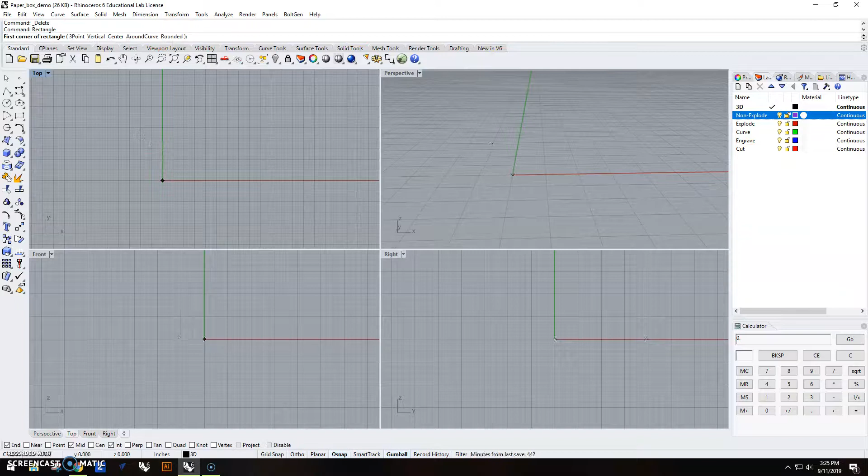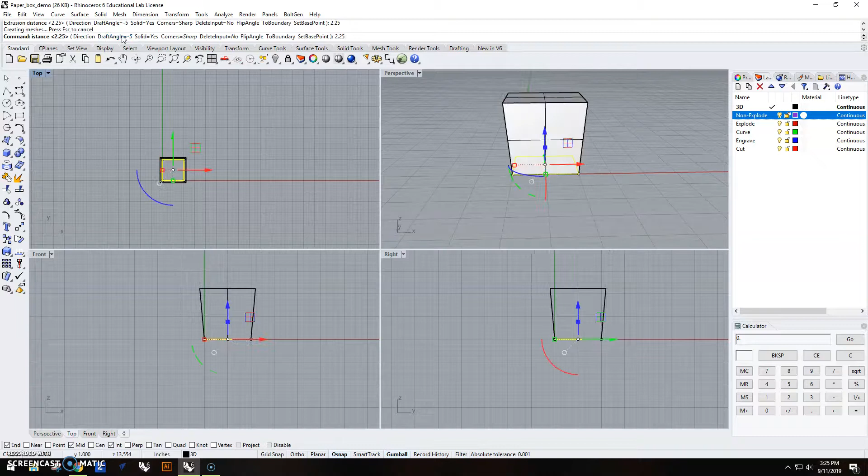So we're going to start with a rectangle. We're going to anchor it at 0 and it's going to be 2 inches by 2 inches. Then we're going to highlight that, go up to solid, extrude planar curve, and select tapered. I'm going to set the draft angle to -5 so it tapers outward from the bottom as we go up. And then extrusion distance will be 2.25. Hit enter, and there is my tapered box.

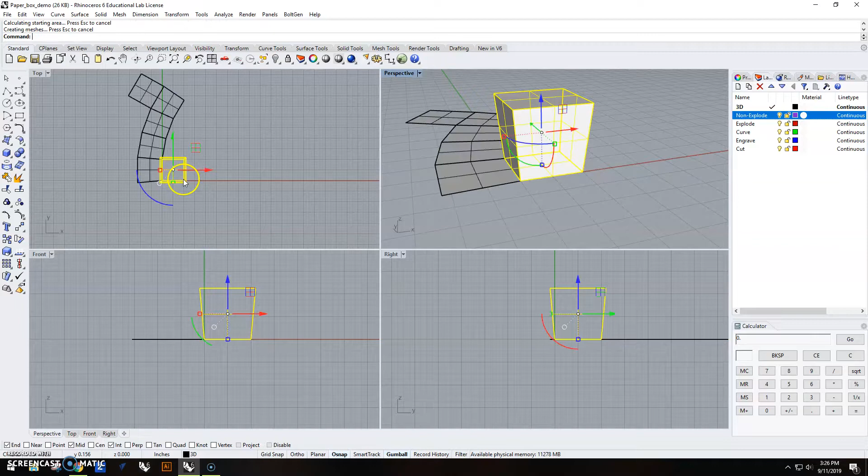Now we're going to flatten this two different ways, and we're going to use it at different times. So I'm going to highlight this, go up to surface, down to surface flattening, unroll developable surface. For the first one, I want to click on explode and have it say no. This will keep all the pieces together. So it's selected, we'll hit enter, and what it's done is flatten this box out into this fashion. I'm going to change this to the non-explode layer, and I'm going to turn that off for now. We will come back to that later.

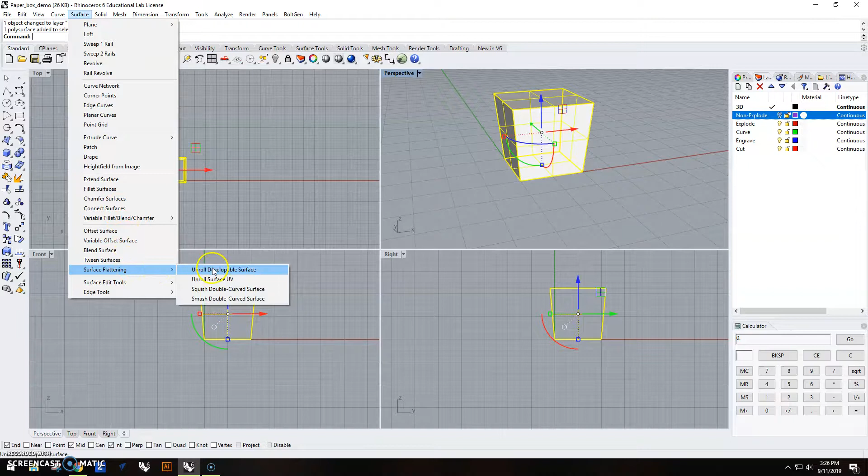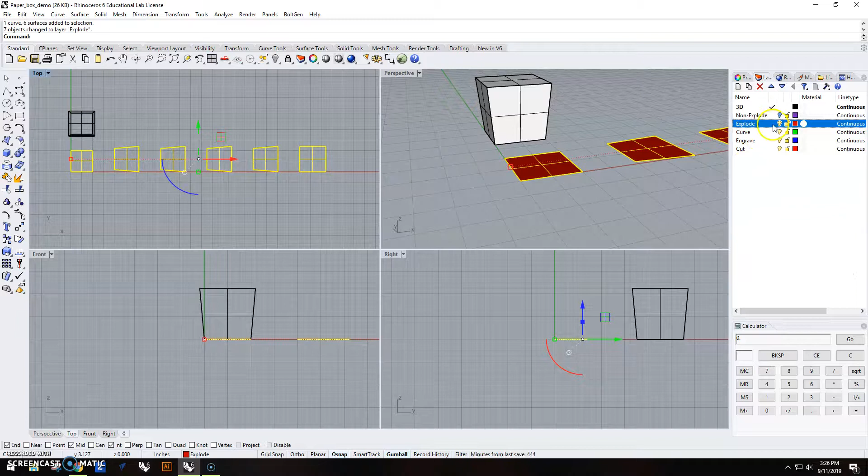I'm going to highlight the box again, surface, surface flattening, unroll developable surface, only this time I want it to say yes next to explode. And then I'm going to hit enter. I'm going to go ahead and move the box out of the way a little bit. And here's the bottom, the 4 sides, and the top. I am going to move those to the explode layer. And I'm going to shut off my box for now.

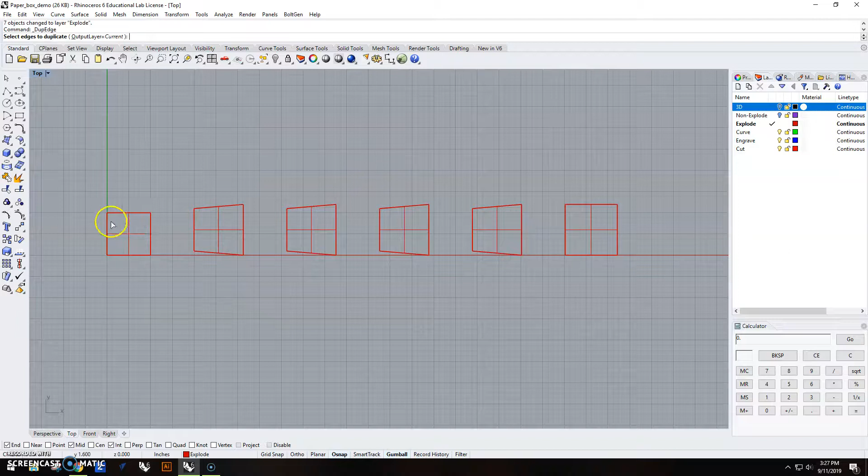So the next thing I need to do is change this so that I have some curves that I can work with. So I'm going to change to just the top view. And I'm going to go to curve, curve from objects, duplicate edge. I'm going to select all 4 edges of the bottom piece. And I should mention we should be in the curve layer for this, as the active layer.

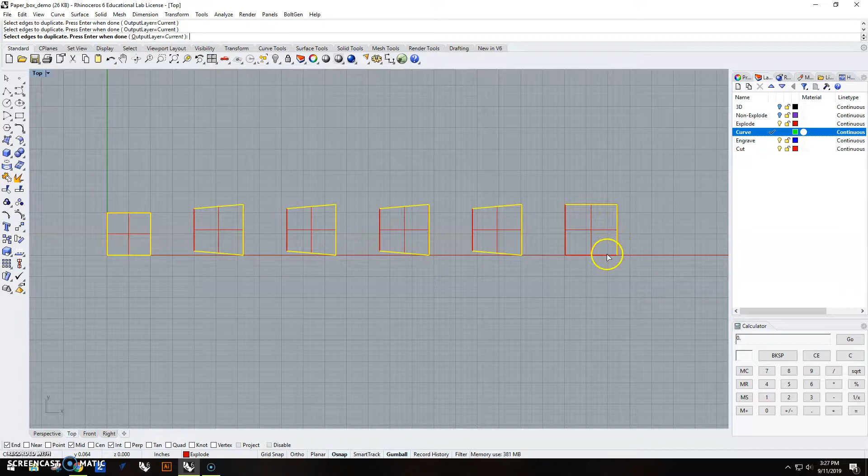Just the 2 sides and the top for the 3 side panels, like so. And then I just want 3 of the sides for the one that will end up being the top flap. So we'll hit enter. I can drag that up. Here's the curves that I'm going to work with. So I can turn off the explode for now. And I'm going to zoom out just a little bit.

So what we need to do is arrange this so we have the 4 side tabs so that they basically array around this. And then we'll add the top tab to one of them.

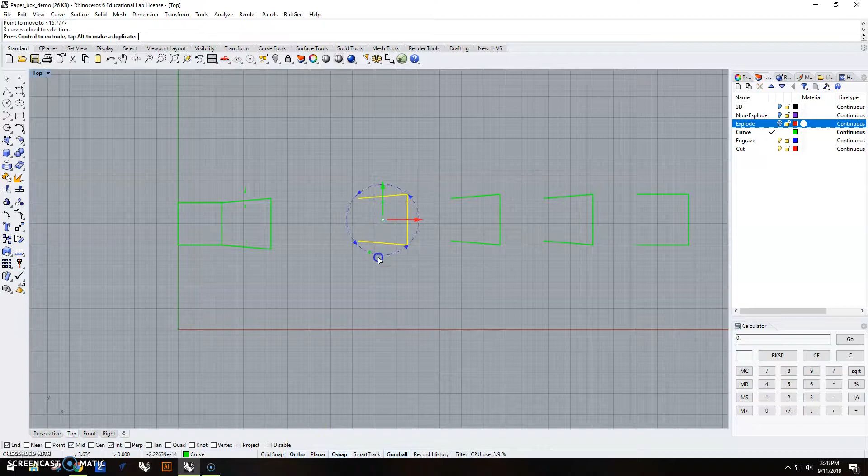So I'm going to highlight these 3, type move, and use O-snap. Make sure O-snap is on and end. Drag that over. And turn ortho on for this one so I can rotate it 90 degrees real quick. Then do move, click there, snap to there. Same thing, I'm going to rotate this 180 degrees. We'll do the same move. Click on one end, snap there. And the other one I need to rotate 90 the other way.

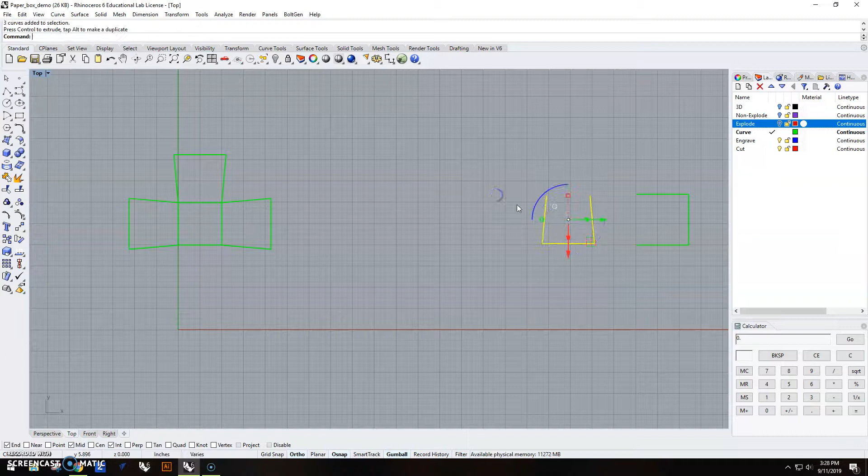Highlight all 3 of those. Rotate, move, just like that. And then the top flap here, it does not matter what side I put it on for now. So I'm going to go ahead and put it on this side. We'll zoom extents so that it becomes a little bigger.

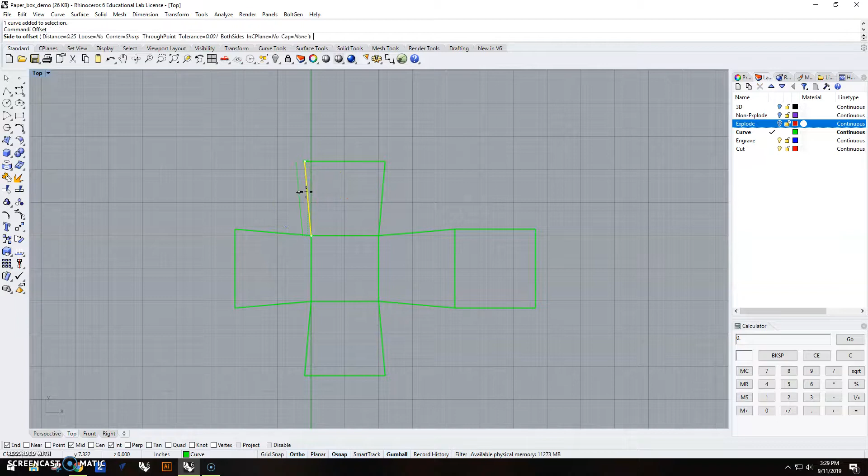I have not joined all these yet. These are still individual curves, and I have to do some offset, so I want to keep it that way. So I'm going to offset one of the sides. Doesn't matter which, I'll start with this one. Offset at 0.25 inches and drag that out to the side. And I'm going to do the same thing for the top here, offset 0.25 inches, drag that out.

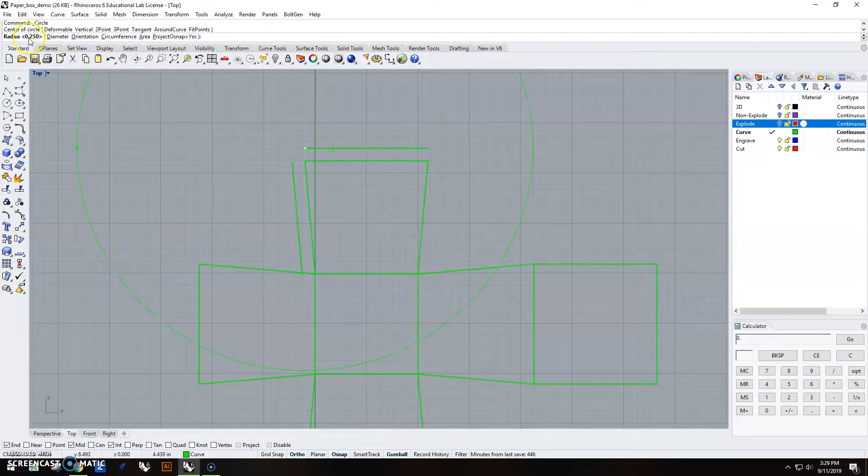Now I want to make 45-degree angles from here up to here. Easiest way to do that is to use our circle trick. So we're going to take the circle, start on the edge there, and I want a radius of 0.25, which I already have, so I can hit enter. I'm going to do that for all of these.

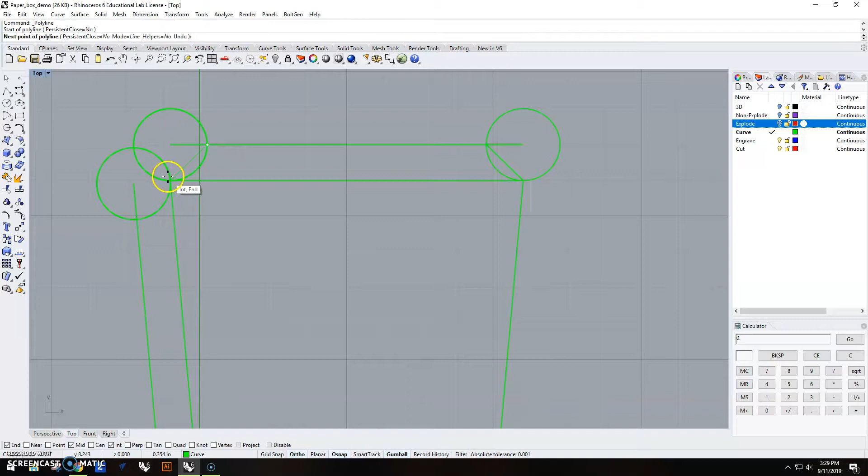With O-snap intersect on, I can draw a polyline from this intersection over to the edge, hit enter, and do the same for each of these circles I drew. That creates a 45-degree angle from that edge to that line. Now I can delete the circles.

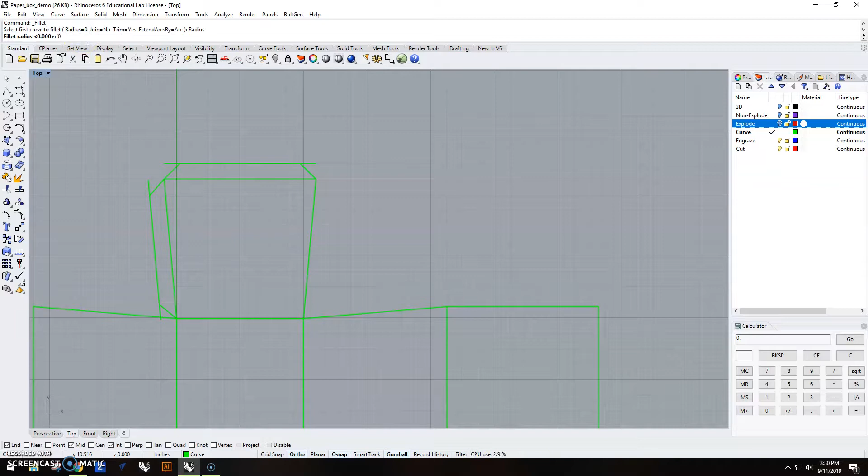There are several ways to get rid of these lines that overhang. We could do a split or a trim, but for this one we're going to use the fillet command and set our radius to 0. If I zoom in, you'll see what happens: click on this side, click on that one, and it brings that down so those are connected. Do the same here, here, and there. That's a little quicker than using trim or split, but any of those methods would work.

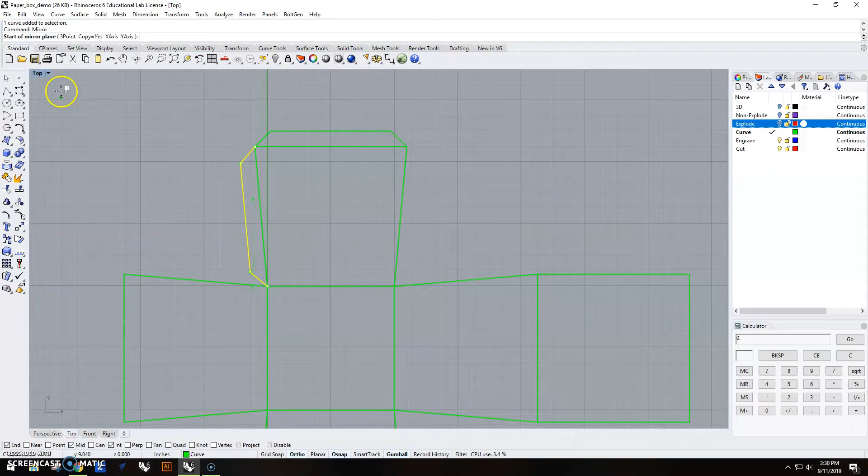Now I'm going to highlight these 3 pieces of the tab and mirror it. Make sure it says copy, and I have OSnap on — I also turned on mid for OSnap, so we snap to the center, then straight down. Now I have tabs all the way around this.

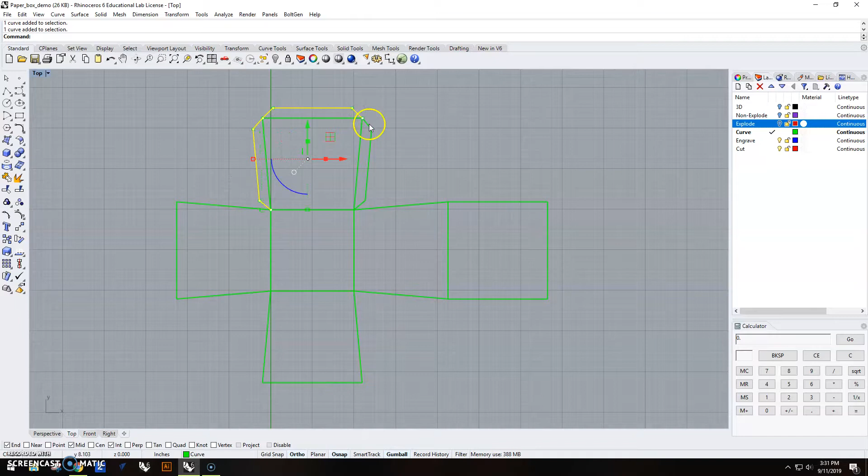I need tabs on this piece and tabs on this piece, so I'll highlight all of those, holding Shift as I select them. Then I can type mirror, this time snapping to the midpoint here. Whoops, let's try that again — hold Shift, pick just the lines, mirror. There we go, now we have that on both sides.

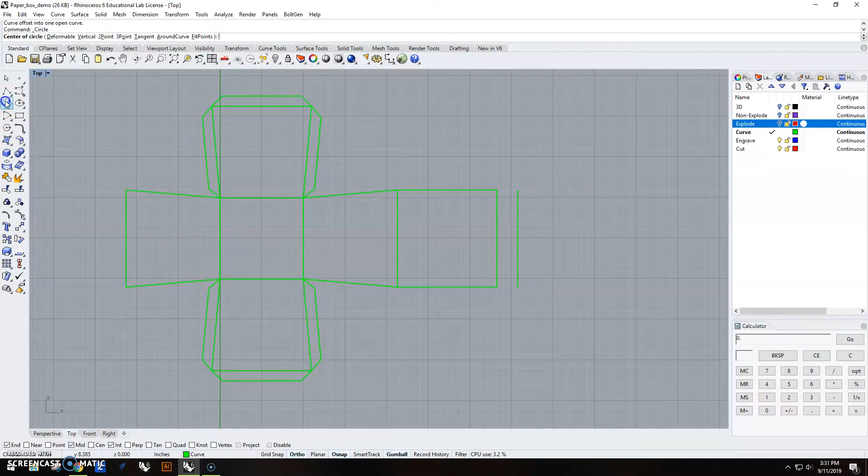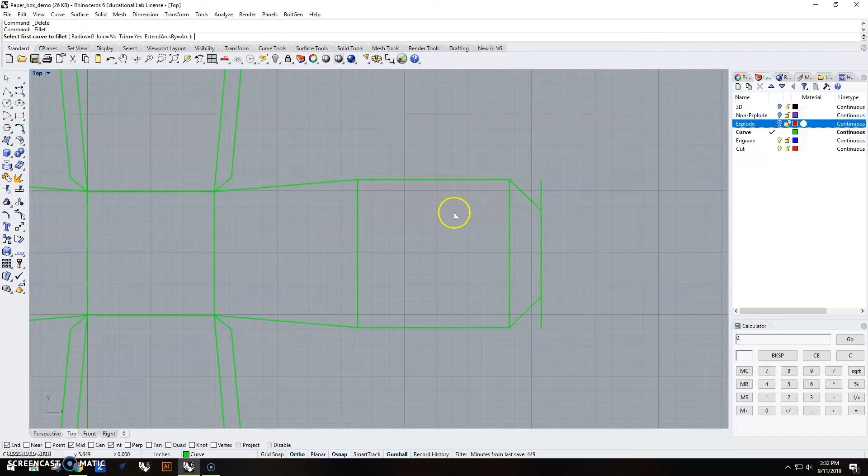For the top, for a flap, we're going to offset this as well — this time 0.5 inches. Drag that out, and use that circle trick again: center here, but set the radius to 0.5, right there. Draw a polyline in from the corner to the intersection, and from the intersection to the corner. Get rid of the circles, then fillet with a 0 radius.

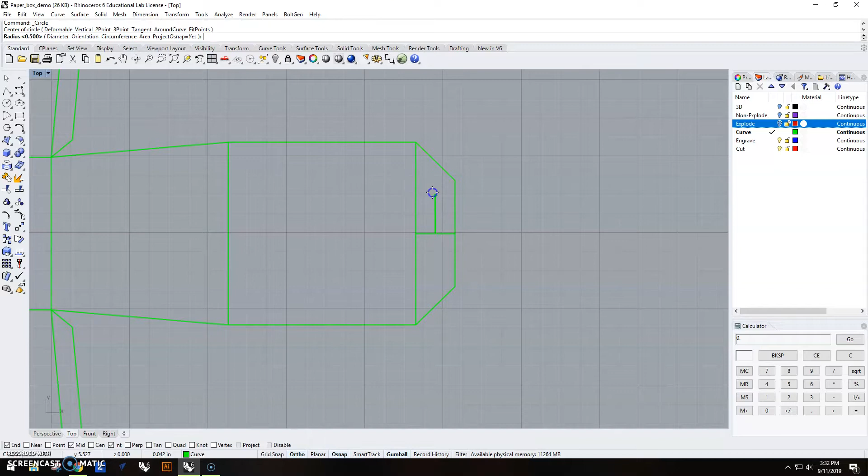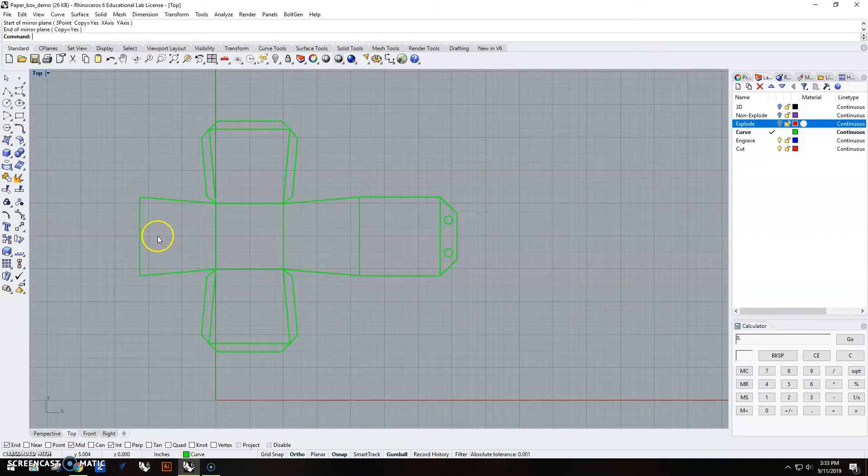I'll get rid of my guidelines here and mirror that. So those 2 holes are going to get cut, and we want them to match up over here so that when the flaps come in, they line up. If I highlight both of these, hold Shift, I'll do a copy command — click on this point up here, click on that point, and hit enter. Now when this gets folded, those 2 should line up.

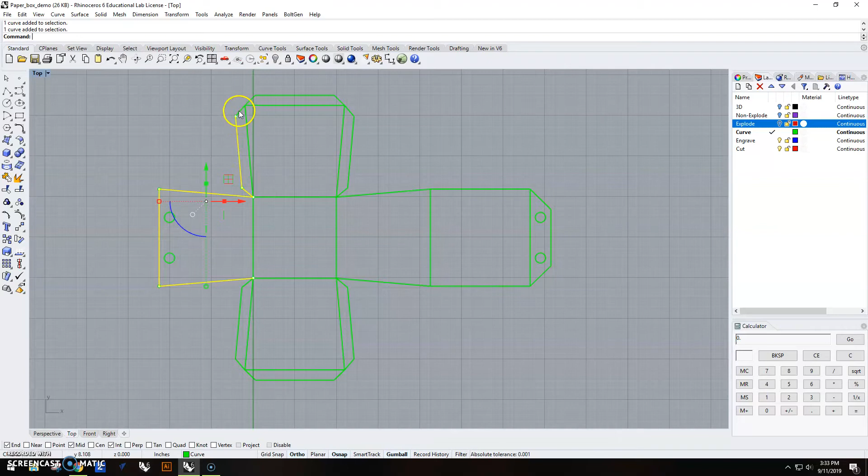So these are all the curves. Next I need to move them onto the layers for engrave and cut, and get things joined. I'll start by joining the exterior curves so it cuts all at a single time — hold down Shift, select all of the exterior curves, and type join. Those are all joined into one.

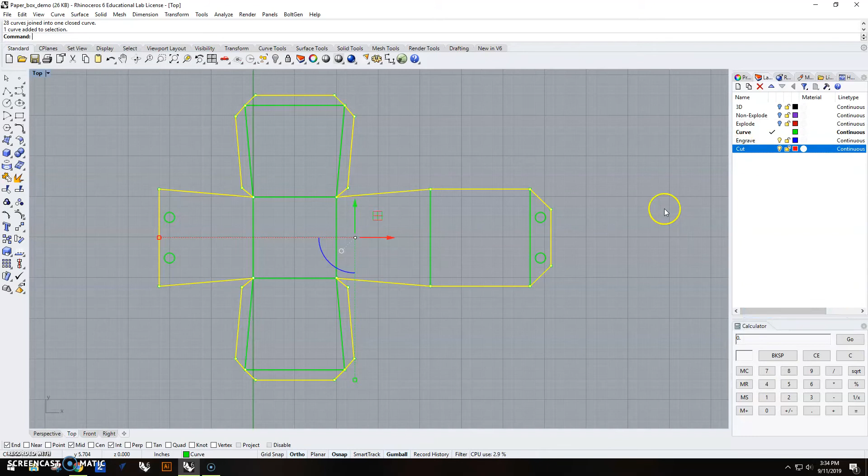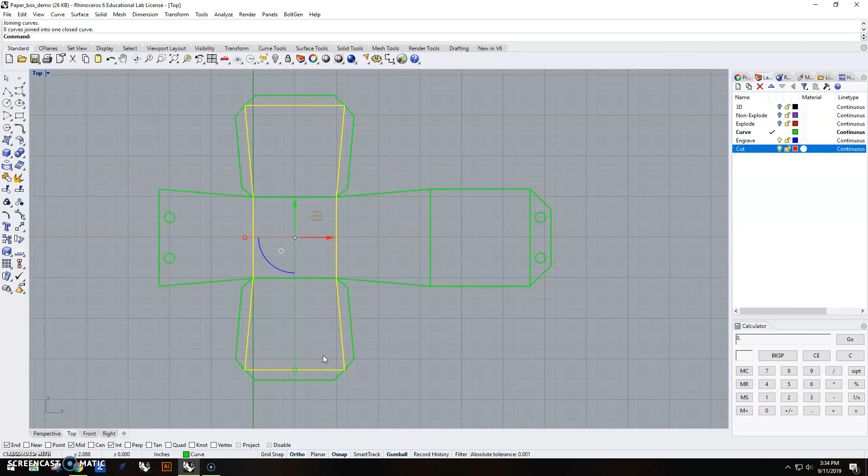I'm going to copy those to the cut layer. The holes get copied to the cut layer as well, so we cut those out — right click, copy objects to layer. Then I'll join my engrave lines that will help me fold the box, starting by joining those so it cuts a little quicker, then hold Shift and highlight these as well, and copy them to the engrave layer.

Now if I turn off the green layer, here's my finished box ready to be cut. We have the red lines for cutting all the way around, our holes are red, and all the interiors are blue. So we can now take this file to the laser cutter and get this cut.